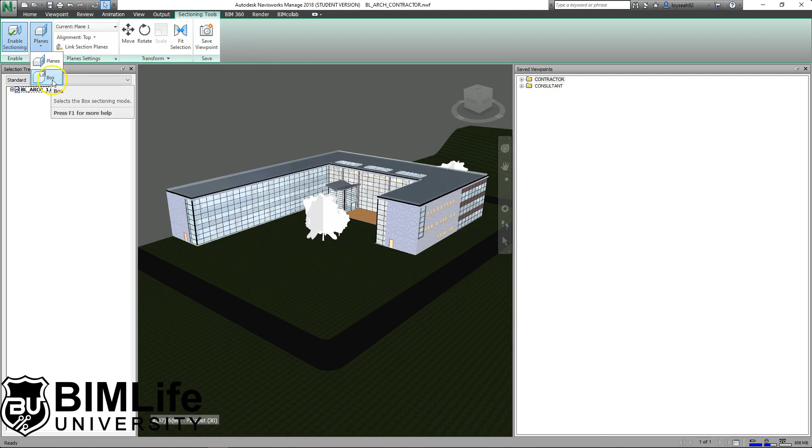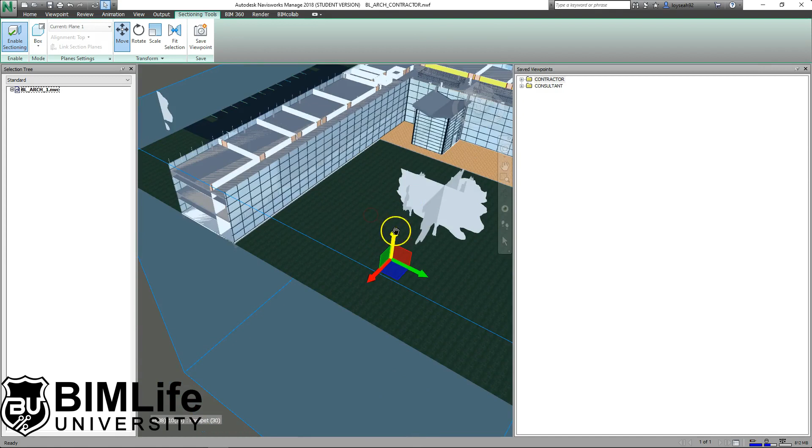With this box, sometimes it's not at the location you want. But there are three arrows that you can click and drag to cut the model. It's a bit of work, but you can cut to cutting level 3, cut to level 2, cut to level 1.

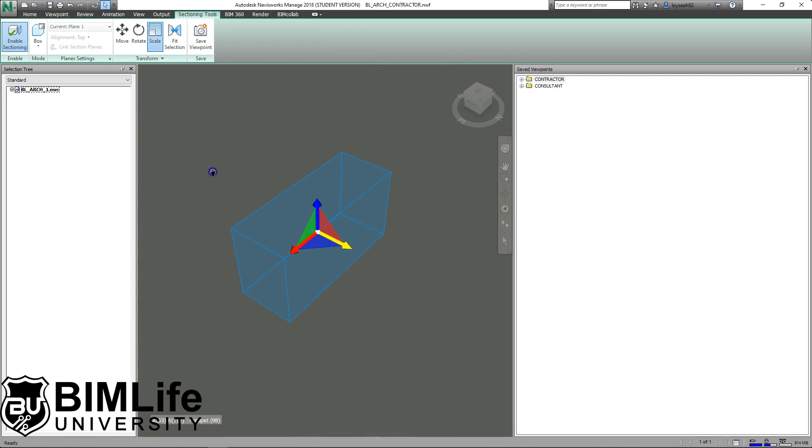If you find that your box is too big, you need to use the scale button, change it to scale. You still have the 3 arrows except this is scale, and whenever you click and drag the arrows, the size of your box is actually changing, depending on how big you want. Just play around, spend a few minutes getting used to it. It's not as convenient or intuitive as the one in Revit, but after a while you should get the hang of it.

So this is the section box, and let's say you're cutting inside the room. I'm going to make the box a bit smaller here using scale.

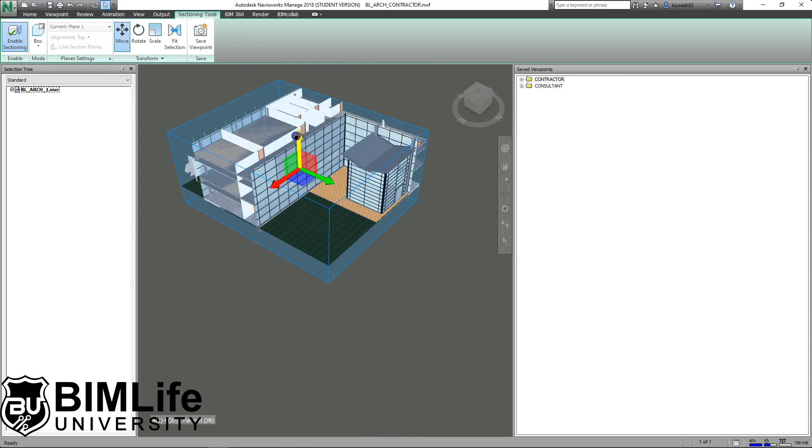So you spend so much effort cutting into a particular view or location of interest. Make sure you save it, save a copy of it. Go to Viewpoint, click on the camera button, and we are still kind of in the role of the contractor. I'm just going to write some name here, maybe cut section 1. If you have an actual project, you want to name it something that represents what you're looking at right now.

You can see the box remains where it was previously. So I like to tell people to save the viewpoints when you create your box, because it's very cumbersome to constantly create a box each time you open the project. It's better to save a copy of it as a viewpoint.

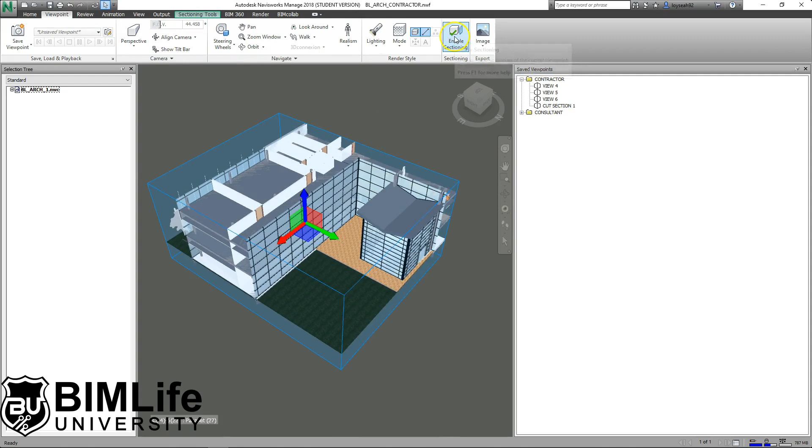Another tool that I'm going to teach you - okay, wait, before that, let me see, cut section 1.

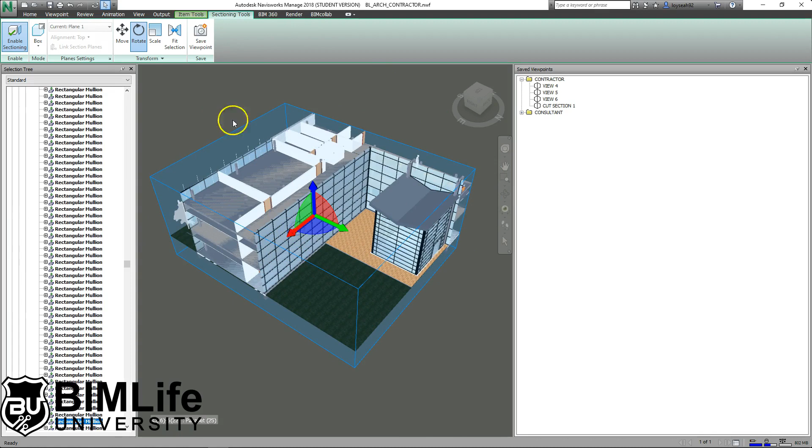Let's say your project is not orthogonal. You can use the rotate button, the box can be rotated. Let me see how to rotate the box. Yeah, you can rotate the box if it's... why is it rotating in this direction? But yeah, you can rotate the box. I'm not going to do it now, I'll figure it out next time, but you can rotate if you want to cut perpendicularly to the model.

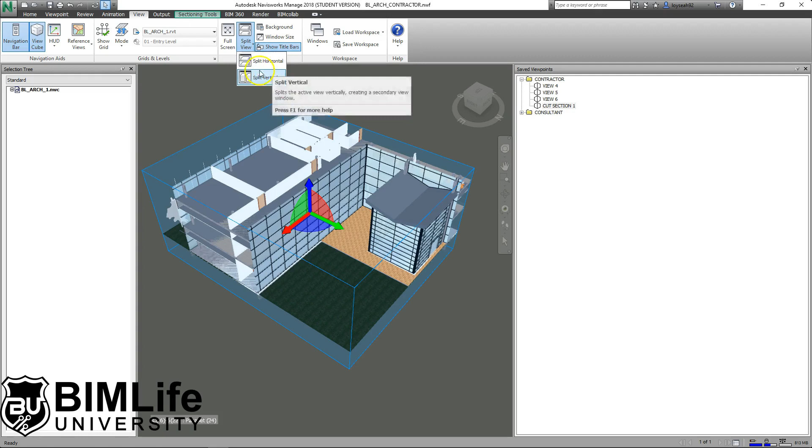Right now I need to go to the View tab. In order to have multiple views, as you can see when you click, you always have a single view. But if you want multiple views at the same time, go to the View tab and use Split View, either one of these will work, depending on how you want to split your screen. So you can split horizontally, and right now you have 2 views. In order to have 2 different views open, just make sure you do a left click inside the space.

For example, if I want to change the view at the top panel here, click on it a few times and click on whatever viewpoint you want. This changes just this one view. It's very hard to see which one is the active view, but it's probably highlighted in blue.

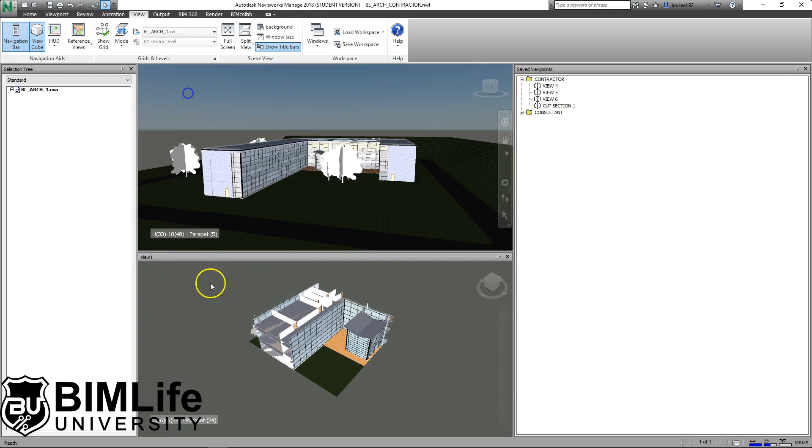Let's say I want to change this one. Make sure to do a left click anywhere here, and change it to wherever you want. So now you have 2 views. And if you want more than 2 views, go ahead and split even further, 3, 4, 5.

Let's say we no longer want to see multiple views. Just make sure to click on those with the X here, so back to a single view.

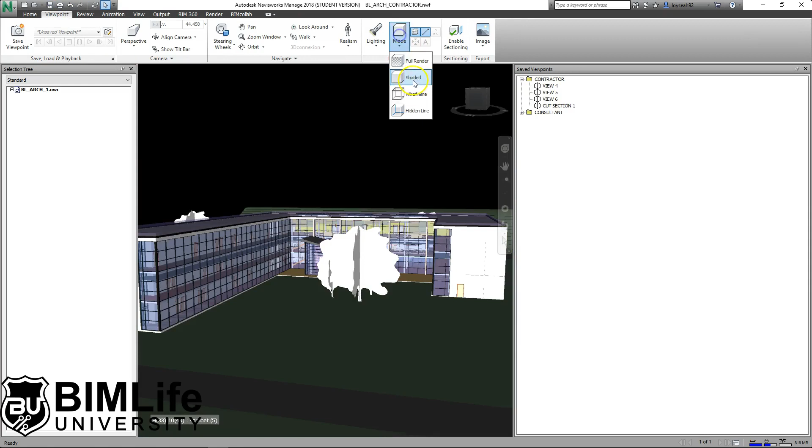You can also change the view mode. Go to the viewpoint tab, modes. There are 4 different basic modes that you can use. They're similar to Revit - you have wireframe, hidden line. Some of them you do not have in Revit, just a smaller set of features available, but not really a problem here.

In the next segment of the video, I'm going to teach you how you can bring sheets from your Revit model into your Navisworks file, in case you want to see your drawings in the model. Look at the saved viewpoints - there are no sheets here. So we are going to learn how to bring the sheets here. Just save and see you in the next section.

So we are back, and our current objective is to bring the sheets that are inside the Revit file and make them viewable inside the Navisworks model. In order to do that, you need to open up Revit. This is the same file in folder number 1, BL_ARCH_1, the Revit file, not the Navisworks file. In order for us to print the sheets from Revit to Navisworks, you need to click on File, Export, DWF.

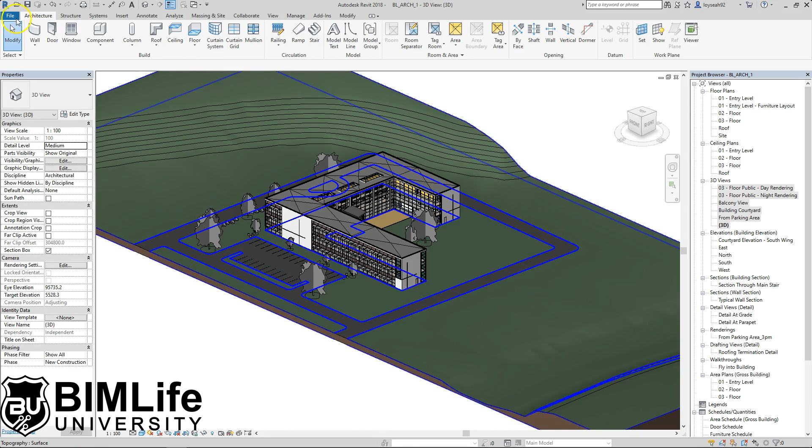We need a DWF format. But before we proceed, just take a look at what sheets you have here. There are 2 sheets, A1 and A2, and those are the sheets that we're going to bring into Navisworks. Just 2 sheets. File, Export, DWF.

Change these settings to be in-session view sheet set. Once you change that, you have another drop down menu - you can go ahead with all views and sheets in the model. Click on check none, because there are some that are already pre-selected, like this one. So just check none, and once you check none, the sheets are actually located right at the bottom - sheet A1, sheet A2. That's all you need to select, then press next.

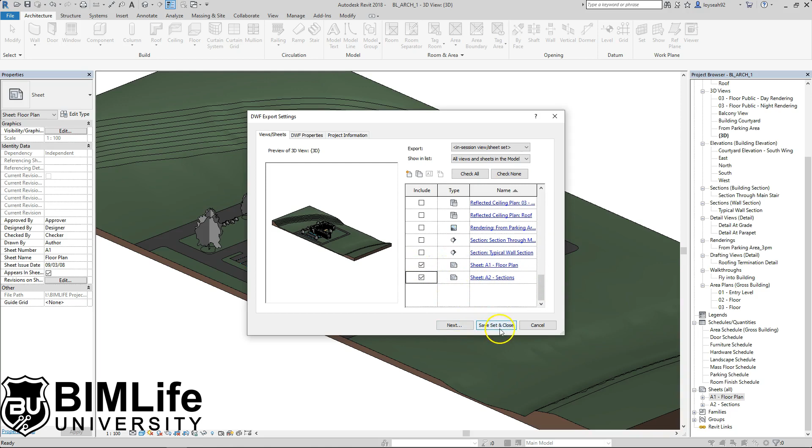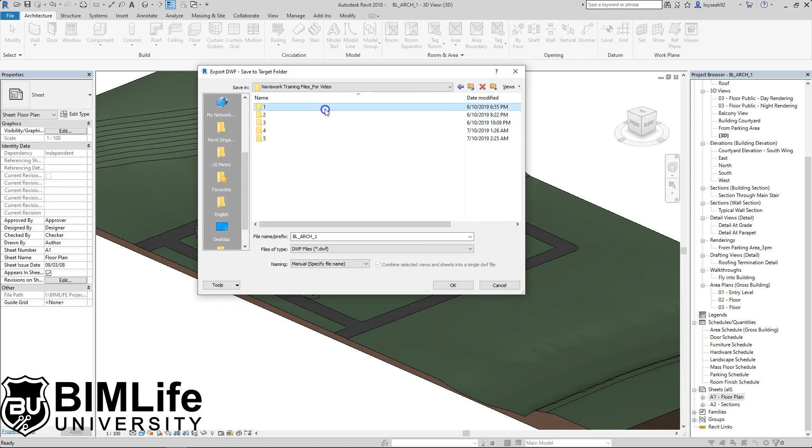You need to change this to be a DWF file - the one without the X, we need the one without the X, DWF. I'm going to save it to the same location, in folder number 1. Let me see, okay, I'm going to save it in folder number 1, press OK.

You don't need to press save in Revit if you never make any modification. All you did was export some information in a different format, so it's not required to save, although you can save if you want to.

So opening up the Windows Explorer, there you go, is the DWF file inside this folder number 1, and it contains sheet A1 and sheet A2.

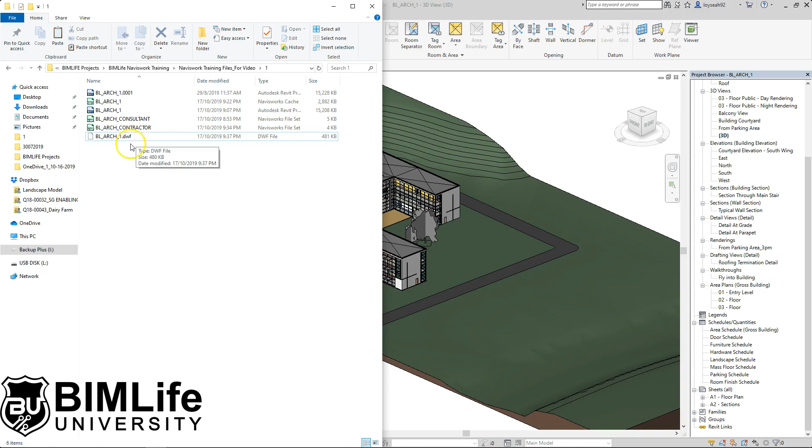Going back to Navisworks here, if you want to add sheets, you need this button at the bottom right, Sheet Browser. You click and there will be a panel. In case your panel is flying all around, you can drag the top here to move it to wherever you want. I'm just going to put it at the side so that it doesn't consume too much space. To add sheets, you need to use this button, Import Sheets and Model.

And there you go, all you need to do is import this DWF file here. Press Open, and there you go, your sheets are here. So you just click on them, and it will show you the sheets here.

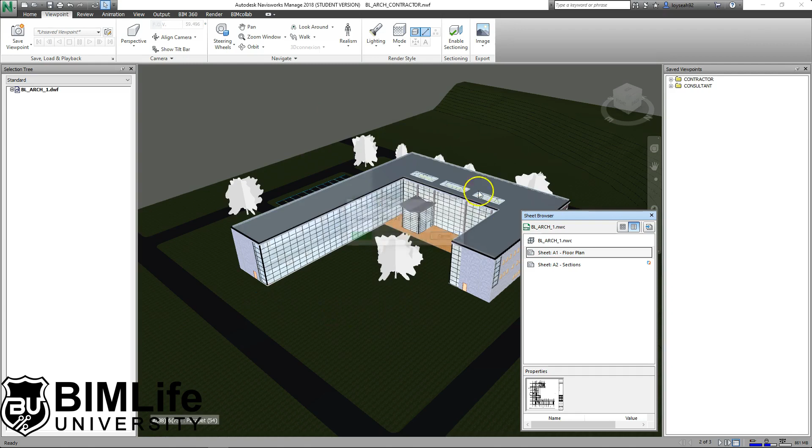The reason why it has this blue and red arrow here, in order for it to disappear, you can just right click and use Prepare All Sheets and Model. When you click on that, after you wait a while, you notice there will be no more blue and red arrows. The reason why there's arrows is basically telling you that you haven't opened that particular sheet for the first time. When you open the sheet for the first time, they will be gone.

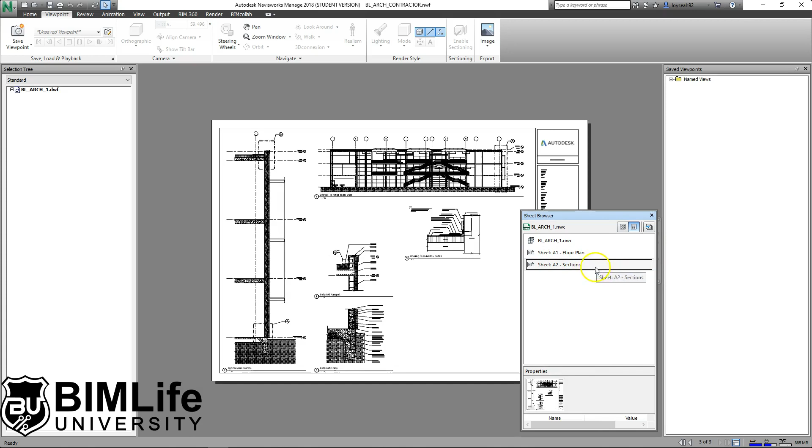So when I click on section A2, why is there no difference? You can see by clicking on section A2, it takes absolutely no time to open the sheet, whereas for sheet A1, it took like probably 3 seconds. So every time you bring in a set of sheets, do a right click, do Prepare All Sheets and Model. So at the end of the day, when you click on the sheet, it reacts immediately, instantly, rather than taking a few seconds.

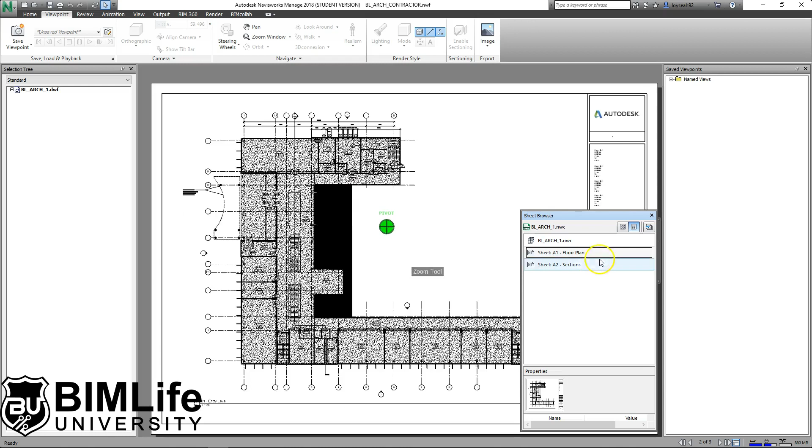If you don't like it, this sheet is not a dead sheet in the sense that you can click on the objects. See, I'm clicking on objects. This is not a dead piece of PDF. You can still make connections to the model, although it looks like a PDF, it is not a PDF. You can click on individual elements just like you would do in a typical BIM software.

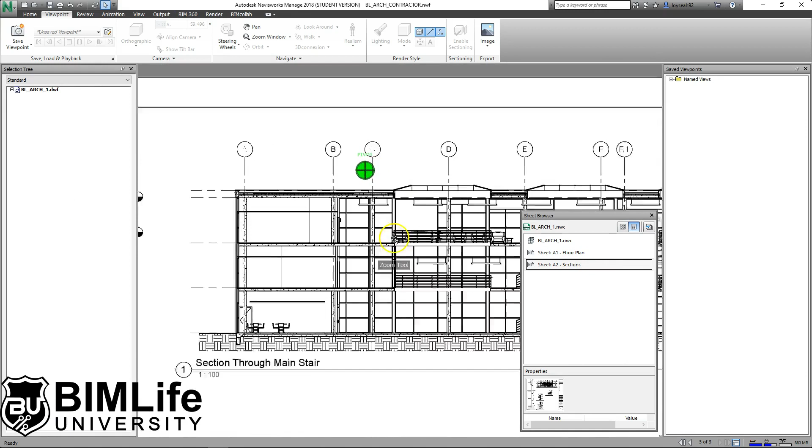Next I try to look at sheet A2 and zoom into this viewport at the top right hand corner. I want you to click on some elements, probably something on the exterior, like this blue piece. After you click on it, do a right click. You need to right click on the element itself - if you don't, you will have a different set of tools. Whereas if you click on the correct position of the element, you have different options. So just make sure you have these options available for you here.

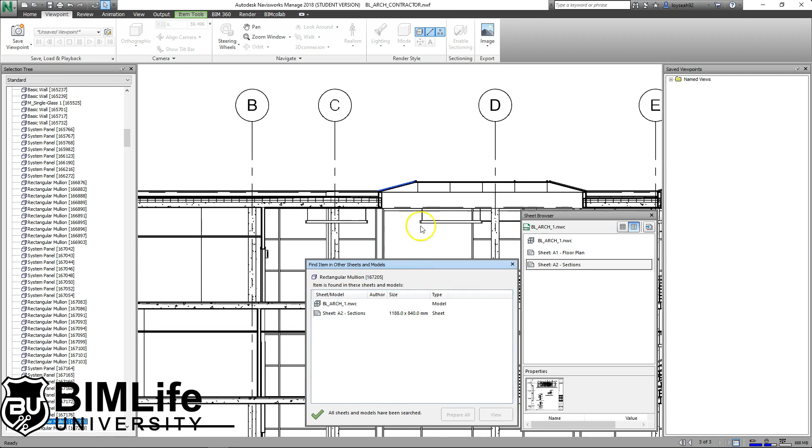What I need to do is use this function, Find Item in Other Sheets and Models. When you click on it, this panel opens up, and you can see that this element can be seen in particularly these 2 views, and one of them is stating sheet A2. Obviously it is seen in sheet A2 because we are in sheet A2, right? But it's also seen in the model itself. So in order to see a particular element in different views, you use this function called Find Item in Other Sheets and Model, and it will display in what particular views you can see that particular element again.

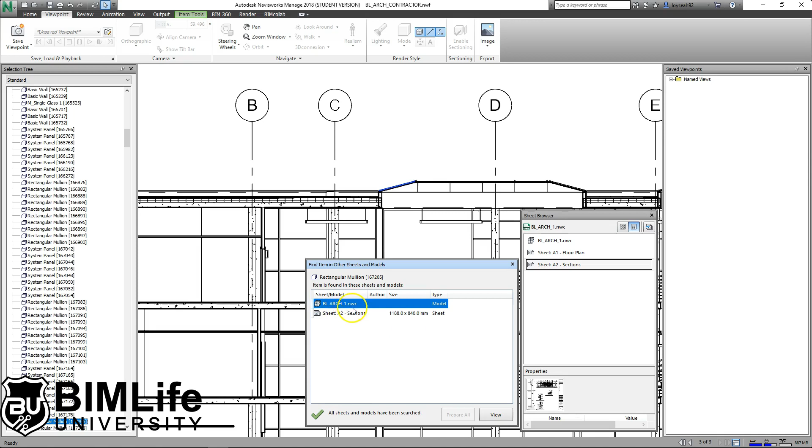So we're not going to click sheet A2 because we are at sheet A2 at this point in time. Just go ahead and go for the BL_ARCH_1.nwc, press View, and you can see it brings you to the 3D view of the element here. So this is another useful feature inside Navisworks.

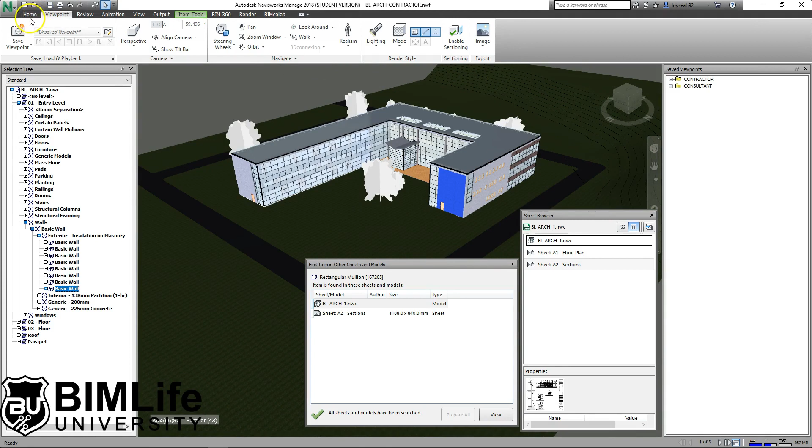Next thing we're going to do is I want you to click on any element you have on your screen, maybe just click on this piece of wall, and you can actually extract the properties. In order to do that, go to the Home tab, and you will find the Properties button here. Go ahead and click on it, and you'll notice there are so many panels in Navisworks. I'm just going to close the sheet browser, close this panel, close the selection tree, and make the Properties panel slightly smaller here.

Similarly in Revit, when you click on your object or element, you can extract their properties. In this properties panel, there's different kinds of information you can get from whichever element you're clicking. You might need to familiarize yourself with this, because Navisworks and Revit show properties and attributes of the selected element slightly differently. You need some time to go through and see what information belongs to which tab. Aside from properties, there's one called quick properties.

So what is the difference between quick properties and properties? If yours is not highlighted in blue, click on it to make sure it's highlighted. Once quick properties is highlighted, you can point at a wall and get some information. You can see I'm pointing at this wall - it disappears after a few seconds, but while it's there you can see 3 pieces of information: the name, area, and volume. As long as you point on the object, these attributes are shown without clicking - nothing is highlighted blue, all I did was point, and the information is extracted.

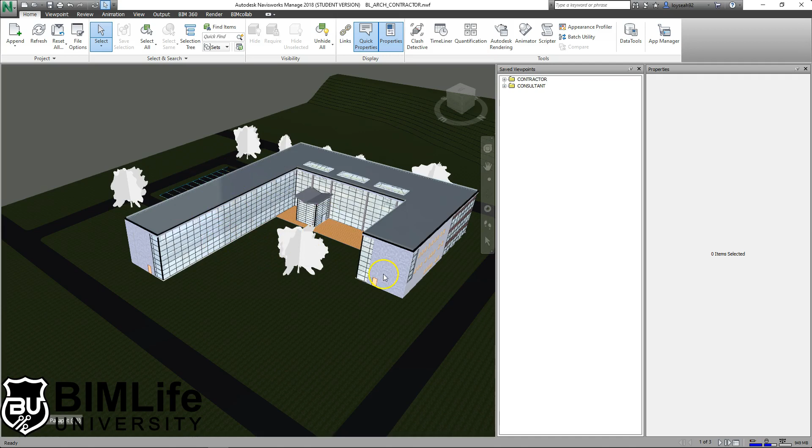So maybe this name, area, or volume is kind of useless information to you - you find it doesn't help in your work. You can actually set what quick properties shows. To do that, click on the green Navisworks icon, go to Options.

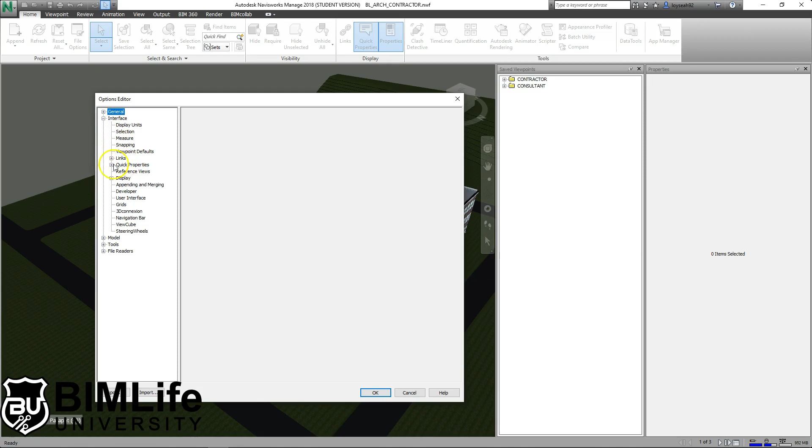This panel is called the Global Settings panel, or some people call it the Options Editor panel - one of the two names for this panel. Go to Interface, click the plus for Interface, and you'll see Quick Properties. Click the plus for Quick Properties, and click on Definitions.

At this point yours might be different from mine, but as you saw, when I hover on the element long enough there is name, area, and volume. If you want to add or remove information, use the plus or the X sign for remove. Let's say I don't want the name - I click remove element, so the name is gone. Let's say I want area and volume - let me see, why not. I believe your computer is now not showing area and volume.

So what you can do is follow my settings - I have name, area, volume. Make sure your category is on the right element. You just need to make a couple of changes here to make sure they're similar to mine.

In case you want other information, I suggest spending some time looking at what you can quickly extract just by pointing your mouse - there's a lot of information here. Once you're done setting these 3, press OK. The reason I already have this set as name, area, and volume is because it's not based on a project, it's based on the computer.

So if the previous person already set this as quick properties, they'll show that information. Yours is probably your first time opening Navisworks on your computer, so you'll have different settings from mine.

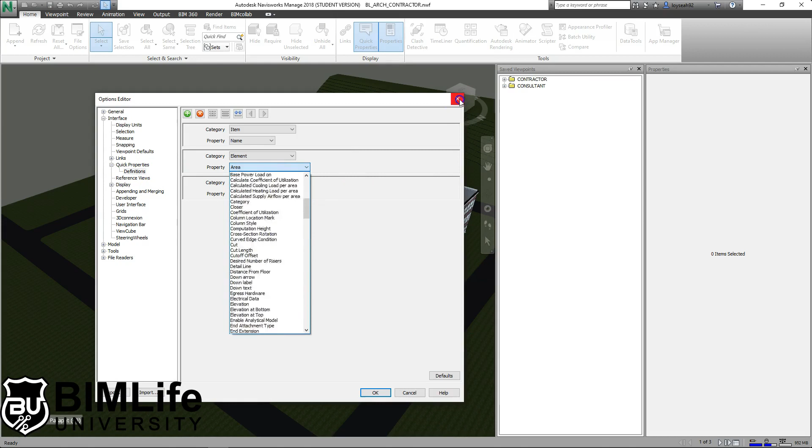So if your quick properties is turned off and you point at an object, nothing happens. If you turn it on and point at an object, the properties appear. That's the function of quick properties. Spend some time coming back to these definitions and figuring out what information would be useful to use, and spend time reading this model. I'll see you in the next session of the video tutorial. Thank you.